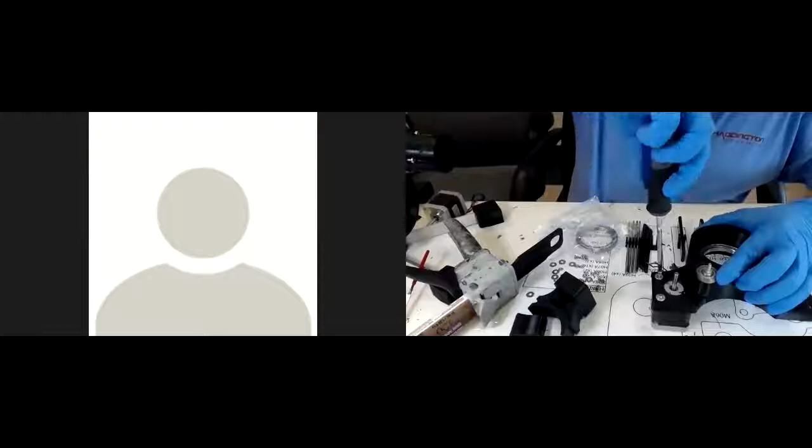Now, as you tighten these down, it'll pull that motor up into that slot. Now, in the manual, it talks about two different sizes of washers here, and we normally put a smaller M3 washer there, but it turns out that it's okay to go ahead and put the number 6 washer there. It looks better, more homogeneous.

Now this one is one that had the epoxy in there, and I can feel that hydraulic pressure pushing back on me. But there's not so much in there that I can't get the screw seated.

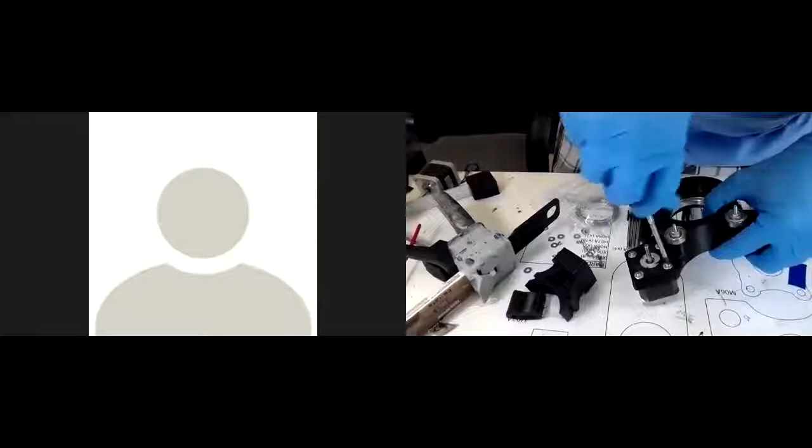And after they're all in, I like to differentially tighten them. Okay, and then clean up a little. Like to have pretty robots.

All right, the other side. Nice and thick. But I already noticed that I got some on that hole. Instead of cleaning it out now, I'm gonna take it off before I get that motor in there. Here we go.

And making sure that the wires go in. Laces in, laces in, yep.

That was a Jim Carrey movie. There's that, laces out. That was his, I think it was his first, Pet Detective, yeah, Ace Ventura.

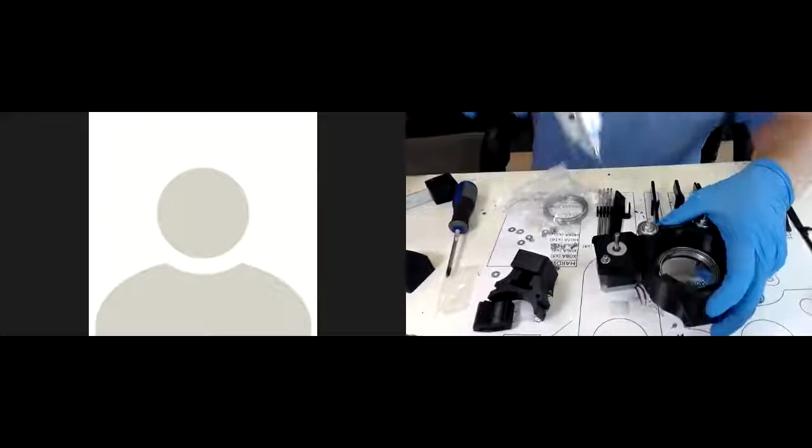Matt's joined us. Cornelius, hey Matt. Hey Matt.

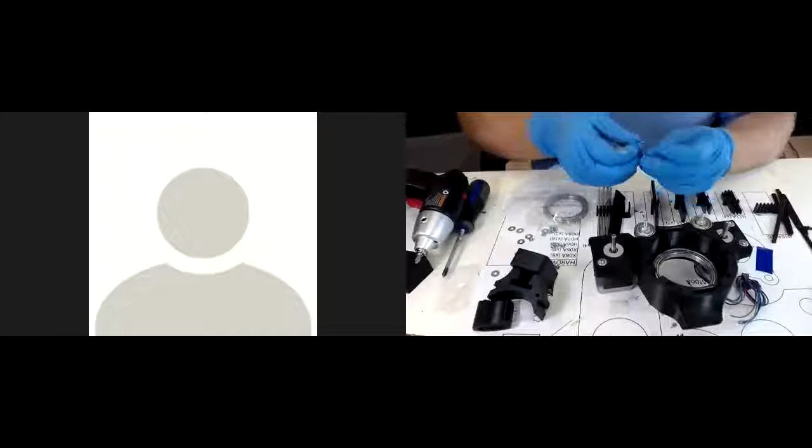It's a wrist break. Well, I turn it because I'm trying to control the torque. I don't want to over torque that until I get all the nuts in, all the bolts in.

Actually, let's do this in parallel.

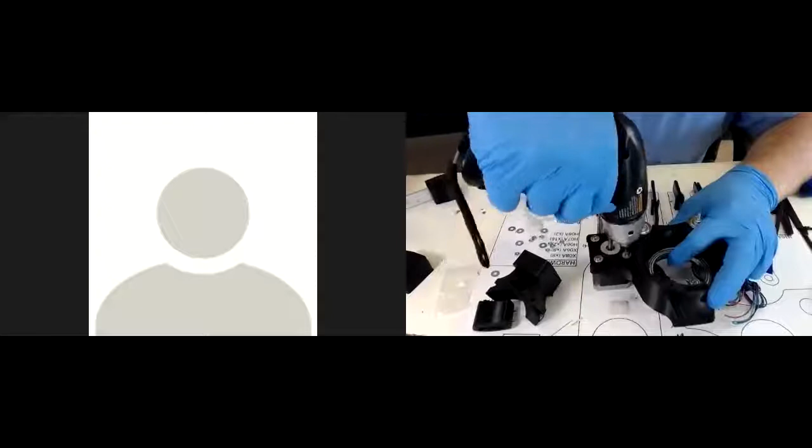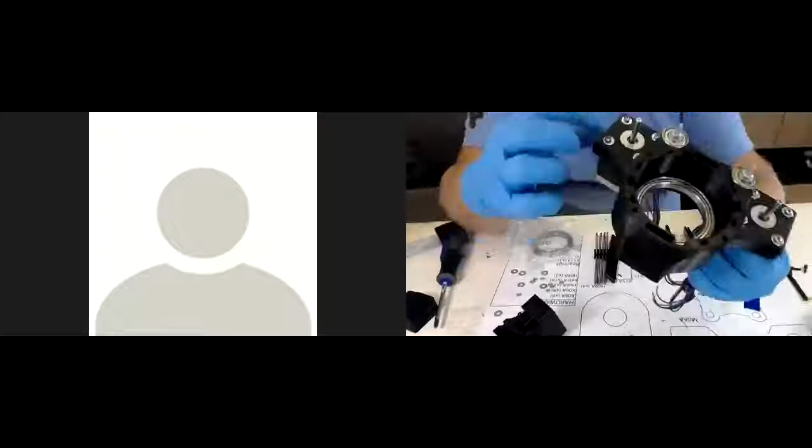Yeah, just enough to see it cinch up. You can see that glue start to squeeze out of there. And the important thing is really just making sure these are straight up and down, perpendicular to this. So if they're cockeyed this way, then when we put the belts on, they'll tend to roll off, and that's no good. All right, let's clean this up.

All right, now we're ready to put it on here and do the rest of the glue up. But before I do that, I'm going to check something. Because we have all thread, we actually dress the ends here after we cut them. But sometimes we don't get it really good, and I want it.

And you need to be able to rely on being able to actually put those bolts on, or the nuts on, while you're - here's the perfect example. I'll put another one when we go to glue. So that doesn't really go on very well, and if it doesn't, then there's some effort that you need to put into it.

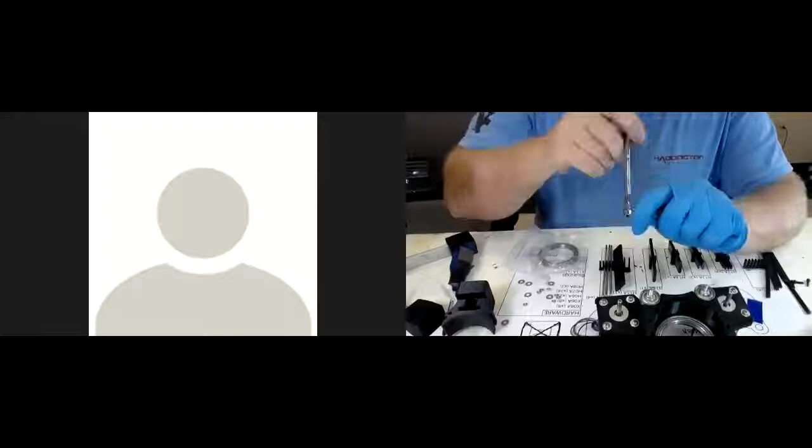There we go. Hopefully one of the sides goes on. And if you can't get the other side on, then this is a technique I use to make sure you get bolts on both sides. And I can do some of these fire. Yeah, yep, go ahead, do that. I'll take it and I'll just put it on the side that I can get it, and then slide it to the other end.

This one is good on both sides. Both sides? Okay, yeah. And if you need to, you can actually then just - man, that's not coming off. That's not going anywhere. Anyway, that's good. We'll use that for the other side. Make sure this one works on both sides. That's good.

And that's a little hard, but it goes on. Good. How's that one? You good? Both sides? Yeah, I checked one, let me check the other. Yep, no, I got lucky. Okay, cool. All right, back to glue.

Put some gloves on. Now this epoxy, actually, you're going to want to put gloves on and protect yourself, and goggles, because if you get it on your skin, it causes your skin to itch, which tells me that something funky is going on there that your body doesn't like. So you need to protect yourself from this. So we selected the epoxy not based on its toxicity, but based upon its strength. It doesn't expand.

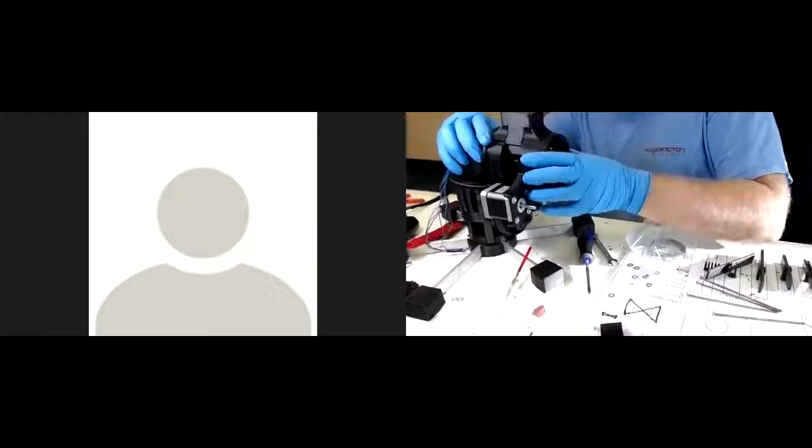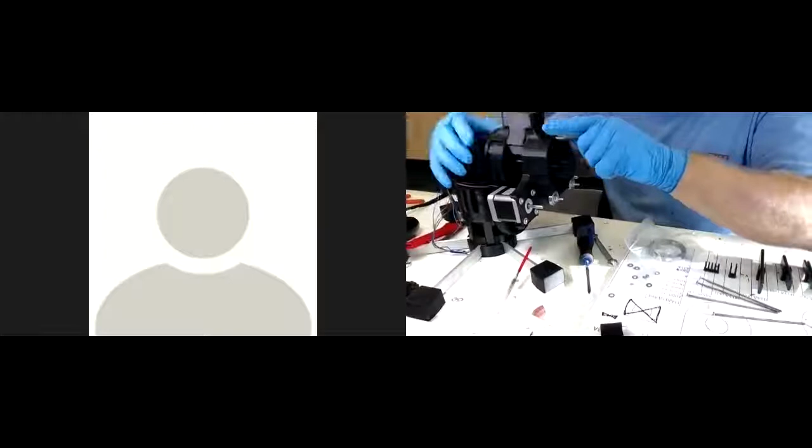Okay. Now I'm going to take the long one. It's actually pretty similar in length. Yeah, they're only 2 mil difference, but that 2 mil at the back is important.

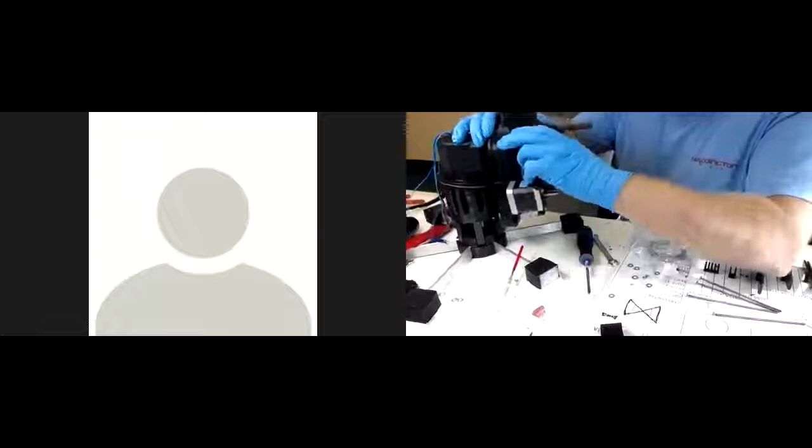Then you actually lube up the well, inside. We're just gonna, I'm gonna put one of these bolts through first. These are non-precision, but they'll hold things together while we.

Get one on the other side. There we go. That'll help. Yep, slide it, the whole project over. There we go. All right.

Now I'm going to goop up the edges of this. And I'm also going to force some down here. And also right through here, because this actually is where it connects in. And a little in here.

And here's another important thing I just noticed. It's good to have this code disk away from all this goo. You don't want to get that messed up.

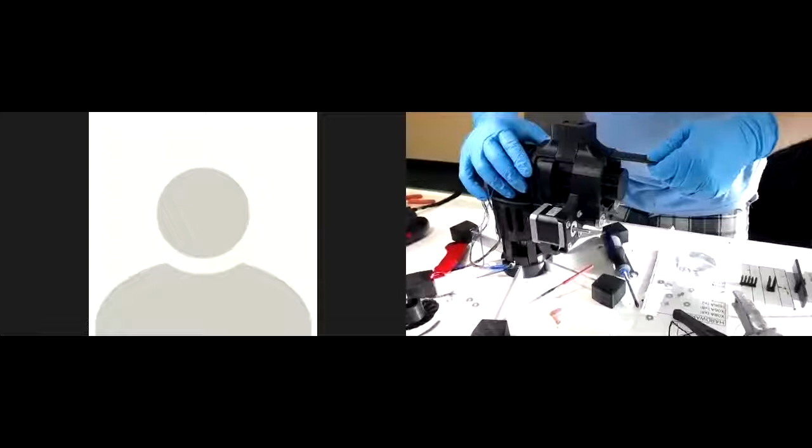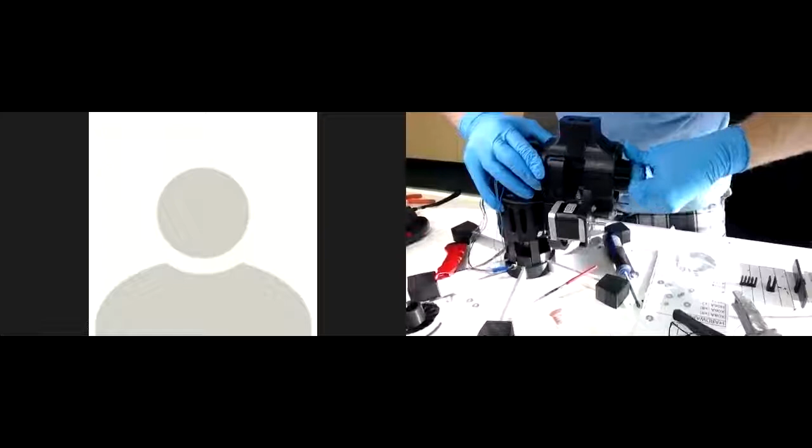Now, this is critical to get the positioning of this front strake correct. Okay, and what we actually want it. Clean this out.

Now again, the reason we're building this up on top here like this is we want the center of those two bearings to be right on the center of the transmission and right in the center of that motor.

Now, once I have this first piece in here, I'm going to put the strakes that hold this in, because this actually gives us a directional alignment of this. So, put some goo in here. And that's where these strakes come into play.

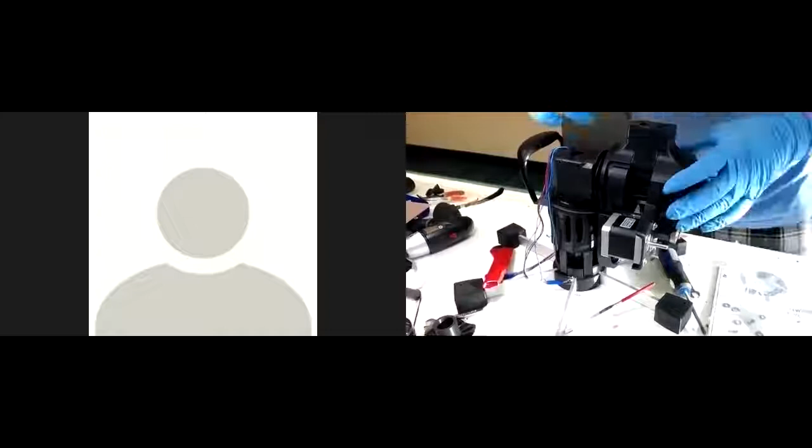And these are the H111A. Yep.

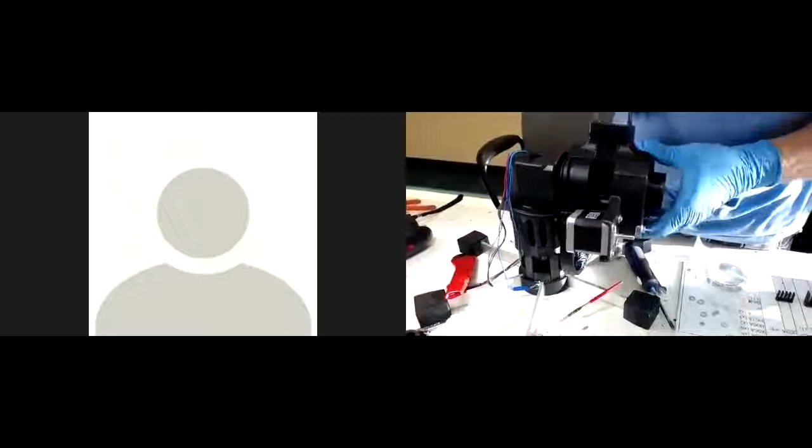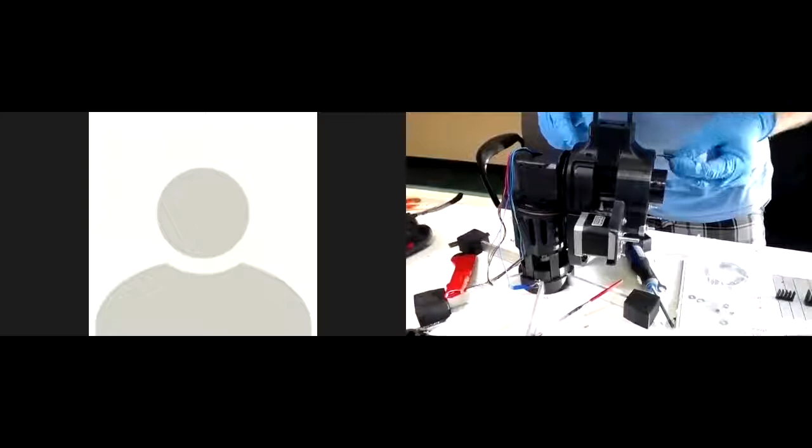And we're going to have to compress this down. Mm-hmm. And this is the reason for this, is that the reason we put these strakes in here, it gives us the, make sure we have it aligned in 2 axes.

The reason for the length of those bolts is we can use them as hard points to mount other stuff on that you may want mounted on the robot, right? Yep. And this is a temporary thing. We're using this all thread to make sure that these are compressed together.

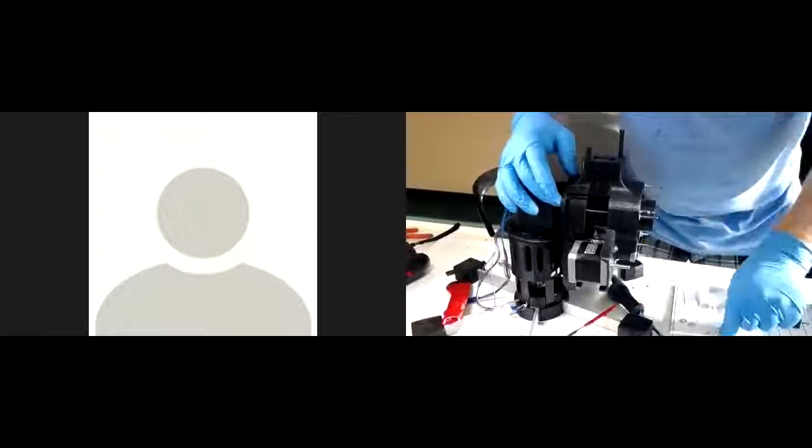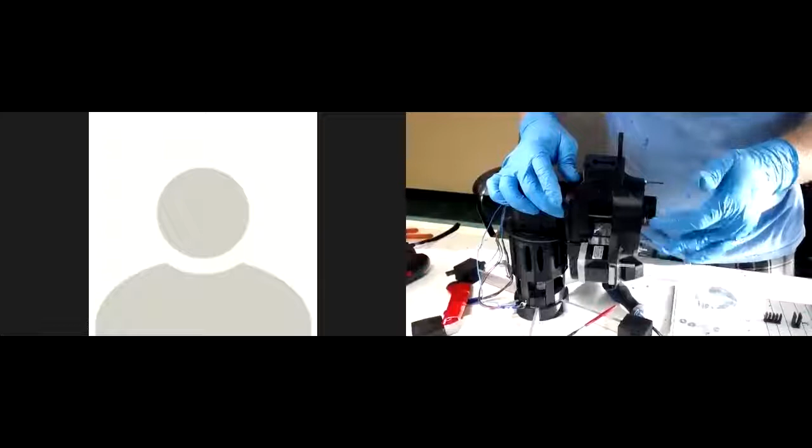And your pot life on the epoxy again is easily 20 minutes. Yeah, so you don't have to hurry through this. And with that mixing tip, it's 20 minutes every time you press the trigger. Yeah. So that's a good trick.

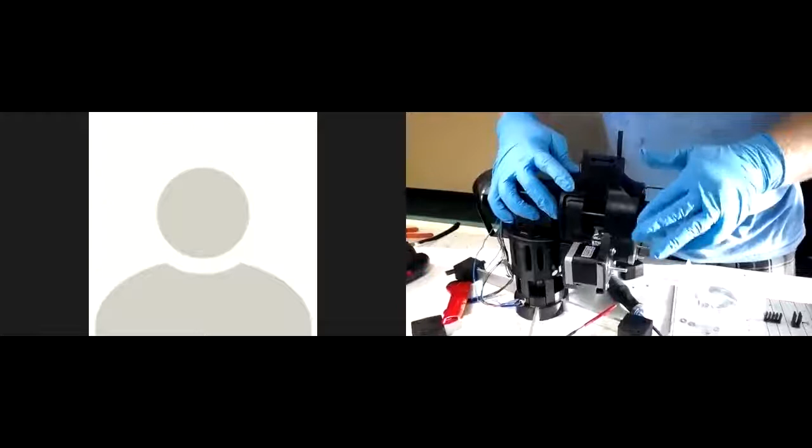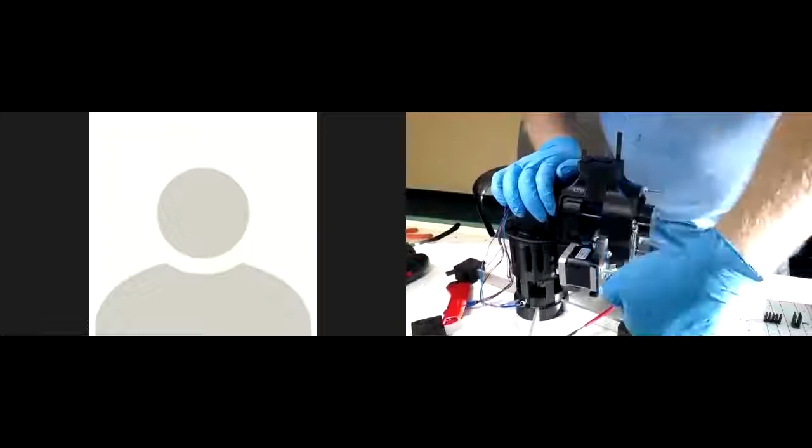I'm just gonna barely tighten these down because I still got the back to put on. Okay, in fact, I'm gonna put that on now so that we have it in there. Yeah, I made that mistake once.

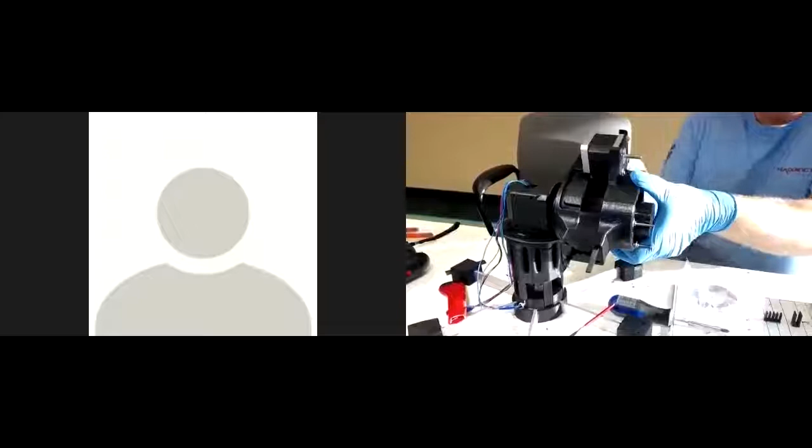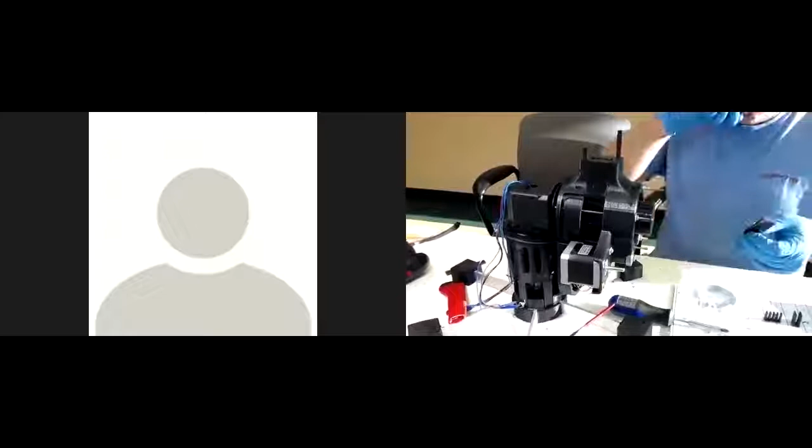Go. All right, I'm going to put the other one in. And you need to comment the importance of the top being sticking out the back. Oh yeah, Todd was just reminding me that you don't want these, oh, the top. Yep, that worked. Yeah, I started that, didn't finish it. Highlight that again. Yeah.

All right, now that I got these two main strakes in there, and I can push down on this. I'll bet you it goes in. There we go.

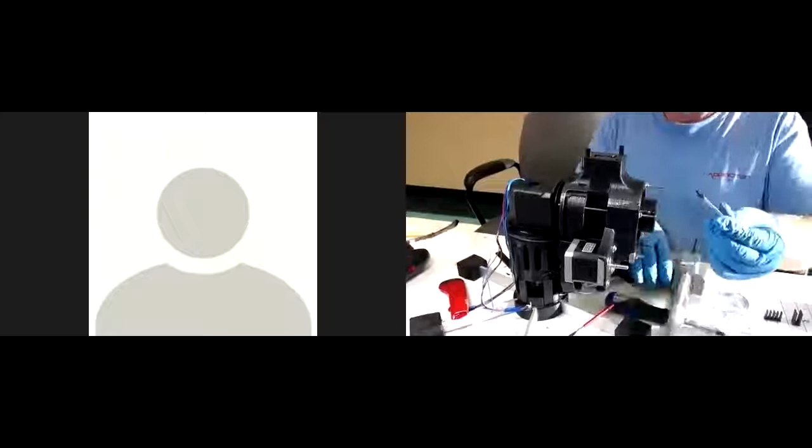Let's get these in. And I like to do these by just putting the epoxy on the edges of it, and as you push them down, they draw the epoxy in.

Whoops, that went too far. It's actually touching the motor, so pull that out. There we go. Yeah. Yep. Good save.

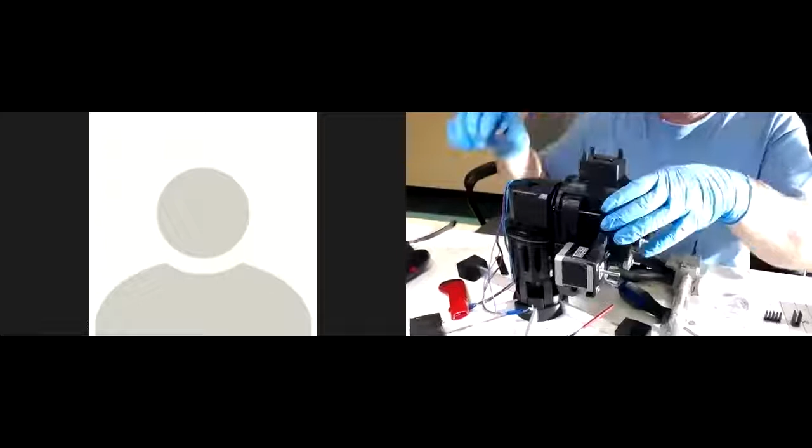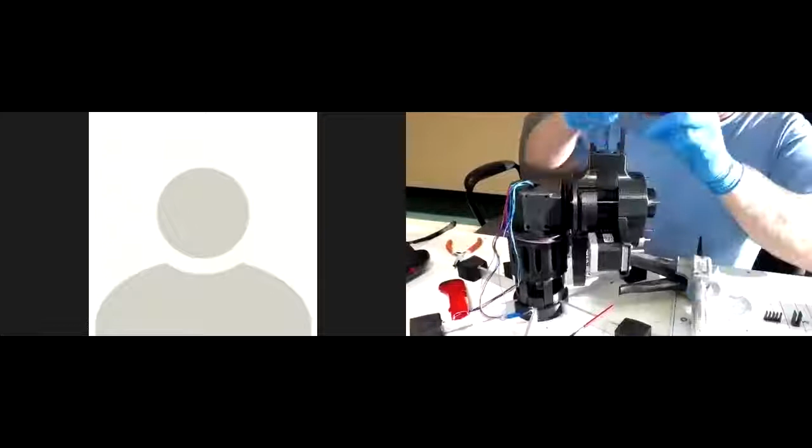Just a little tap. There. All right. There's that.

I'm going to take a tap on it just a little bit. Actually, that's not a good idea. I can feel it pushing it away from the, yeah. So, I want to leverage that. I'm going to hold it while I hit it. Nope, I'm not going to do that. It's out too far? It is out too far.

What you really want is just about 2. There we go, there we go. That's perfect. That's about 3 millimeters, right? Yeah, well let's measure it. You got a caliper? Yeah, the real. Well, and these need to be clean too. I want this clean.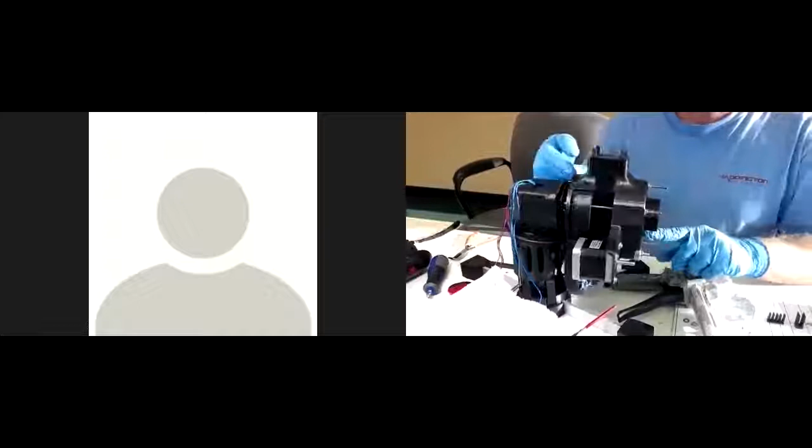on this side we want to be flush with this. Otherwise, we have to grind them down also, and the pivot stator holder comes over the top of this.

So now that we've got the two main orienting carbon and strengthening carbon fiber strakes in there, I'm going to put the other pieces of all-thread in there and tighten down on this, and make sure we clean the top strakes as well. We've still got to put the I-beam in there.

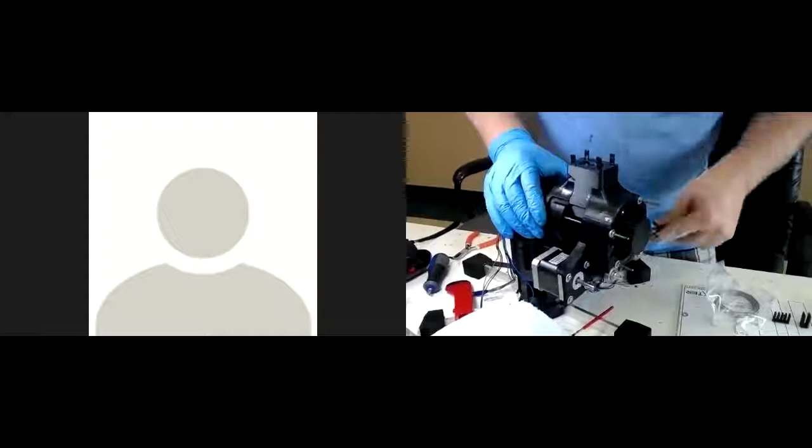Matt says we should have Haddington branded science aprons. I like it, that's a great idea. Well, we do, we even got the shirt with -- we should send a T-shirt with every kit. Plastic ones. Oh, plastic apron, that's a good idea. Okay, that's good, all right.

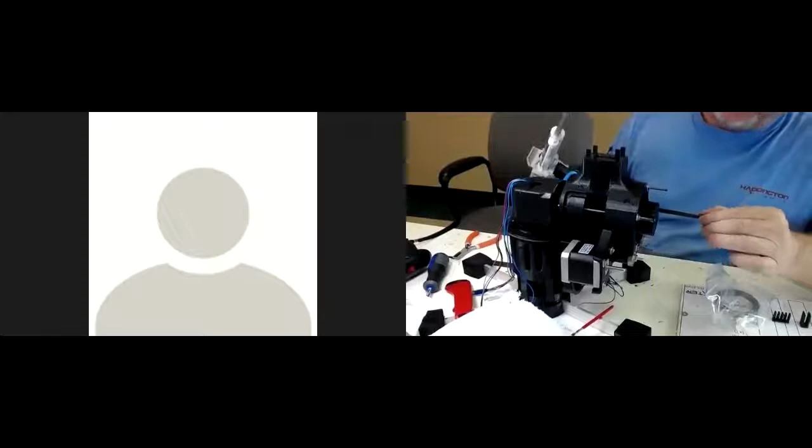Now we're going to put in the other strakes, get those glued up, and this is a kind of a trick. We don't really want to put glue on all at the same time. I actually don't put any glue at first, I insert the top in, and then while it's down here -- can you see that, Todd? -- right in here, before I insert it into this bottom hole, then I put the glue on the edges there so that goes into it. Then the same thing on the top here. I put it right next to the hole so that it can wick in as I push it in, and I'll actually move it back and forth in there to fill that.

And I want these to be past flush on the top side here.

Now that I got the bolts done, I'm going to put these gloves back on. It really makes your fingers itch if you get this epoxy on your fingers, and it's probably, I don't know, probably dangerous.

Well, the material safety data sheet says, yeah, don't get it on your skin, fingers, ventilated. Yep, don't drink and glue. Don't drink and glue.

Good, I like it. All right, same drill for the other ones.

Oh he said, yeah Matt, I just see that -- just thought someone holding a flashlight shining the holes, or the holes are part of it, would be good. We could see if that works. Next time I'll turn on the flashlight. Okay. Oh yeah, flashlight from the phone, good idea.

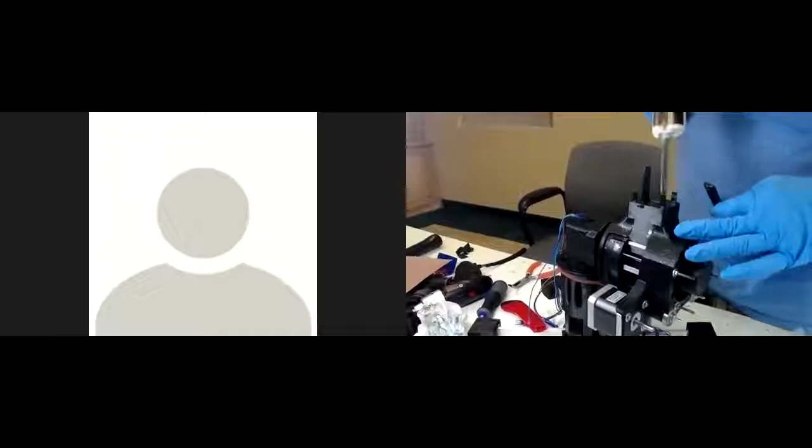And this is butting up against that strake that's going through there. A little bit more glue in there. There we go.

And then I'll actually put a bead on each side of this, because when I slide in the large one, and now there we go. You know you've got the right amount in there when it starts to push out the glue. You want to get this so that it actually touches the carbon fiber strake that's going down the other side. This is your main support system for the arm.

Cool, and because this came out of the edges here, we know that we've got that chamber completely full of epoxy. And then you're going to want to clean out the rest of it. I actually will clean it up along the edges to get the I-beam completely covered, those intersections.

You don't want it too much because you still have this intersection coming down. So you want the center of it cleaned, but the edges, the corners where the I-beam is, you could go ahead and fill those up because that has the same profile. Yeah, the profile here, can you see that?

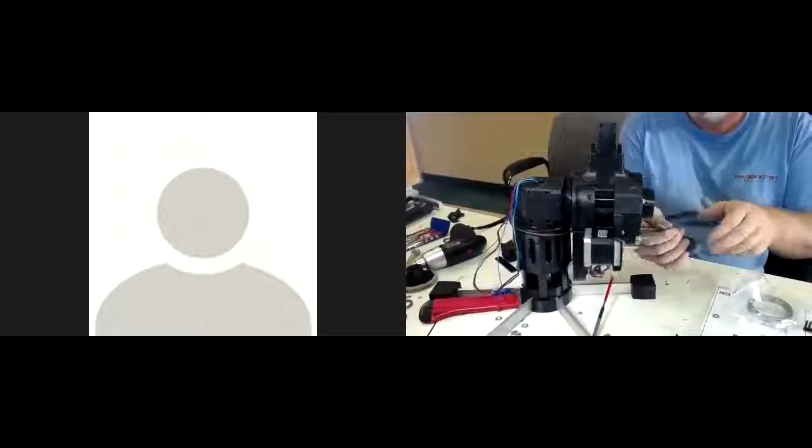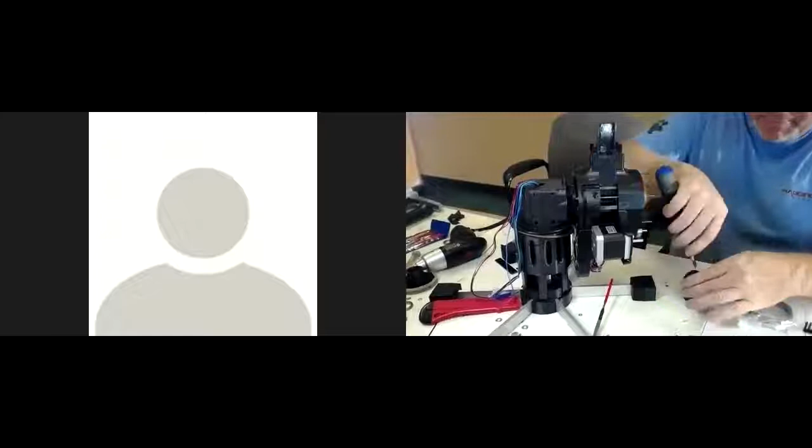I'll let you pull those out while I'm doing this next step. Okay, so now we're going to take 6 of these number 12s of the hex heads and these washers, and we're going to insert them.

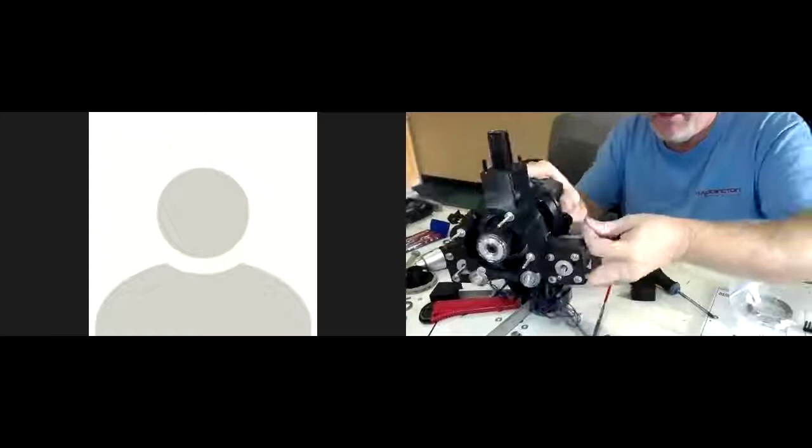Let's see, sorry, it's shiny. Yeah. Into the holes here. Let's see if we can't get some light on that. Oh yeah, that's actually showed up really well. Okay, that's good. I'm going to grab a transmission and just...

Right in your face, but that's all right. Can you see well? Can you see it good? I can. Okay, so I'm going to put the washer on the screw. Hold it in front of the light.

And then now these are just the right size. There's a little carve out in that flex spline holder that holds that washer, and it's just the right size to position that washer correctly.

So sometimes you need to make sure that it's actually seated in that part, or else it won't actually touch. See, that's incorrect right there, because it's not actually pushed down into the plastic. So I'm going to use a screwdriver and push it down. There we go.

Now it's seated correctly, can you see that? Yeah, can you see the difference? That it's inside the lip. Yeah, it's under the lip there. Yep.

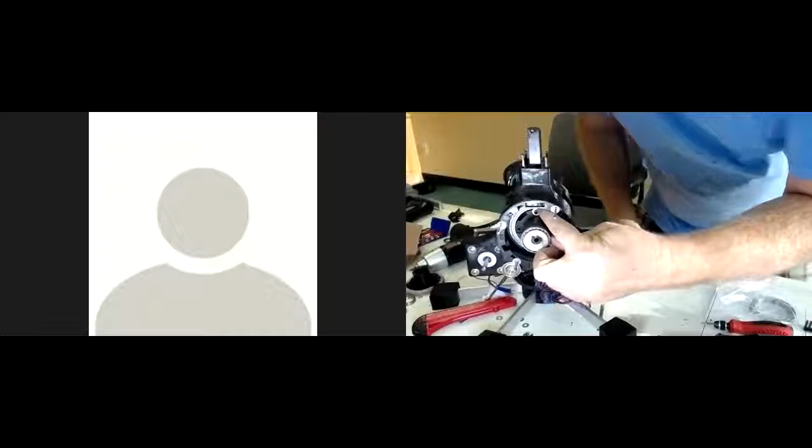All right, now as you can see, the washer actually touches the inside race of that bearing, and when we tighten down on it, we'll actually deform that washer just a little bit, and we know we'll have the right pressure and pre-stress on that bearing.

Let's get all 4 of them in. And the last one.

I'm going to leverage gravity here. You've seen the other ones. There we go. You guys don't have to assemble it this way for the camera, but you can turn it up and use gravity to help you orient those washers.

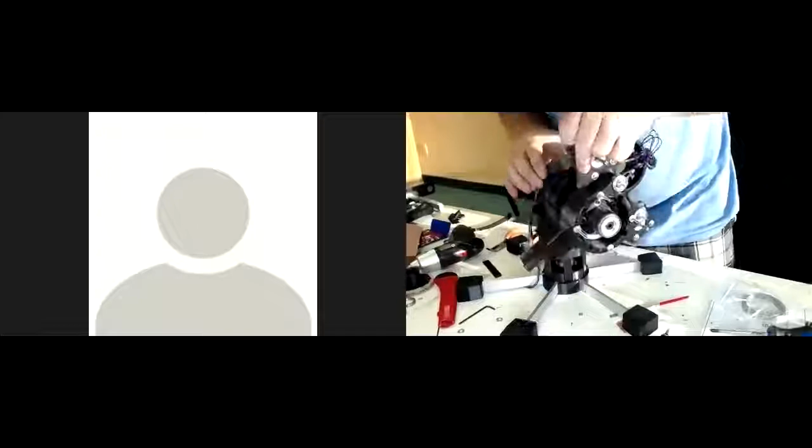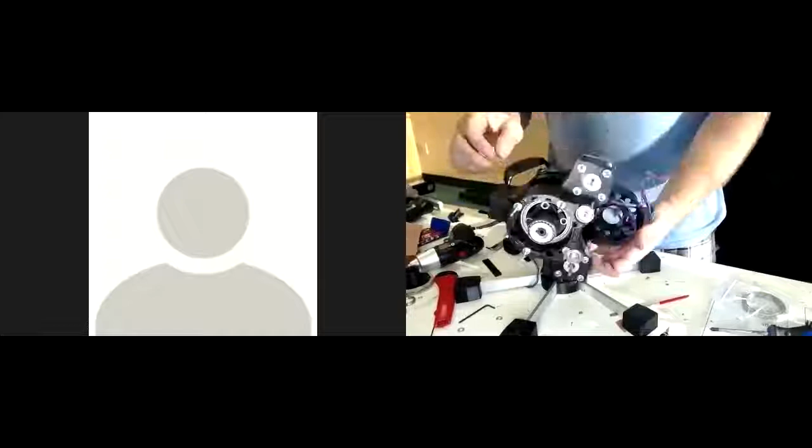And while this is drying up, we kind of move this around so that we can make sure that there's no binding anywhere in there, and that it moves freely. With that bearing pre-stressed like that, it'll actually amplify any issue if this is off center, if the bearings are not centered with the motor, it'll amplify that feeling. But this is really smooth.

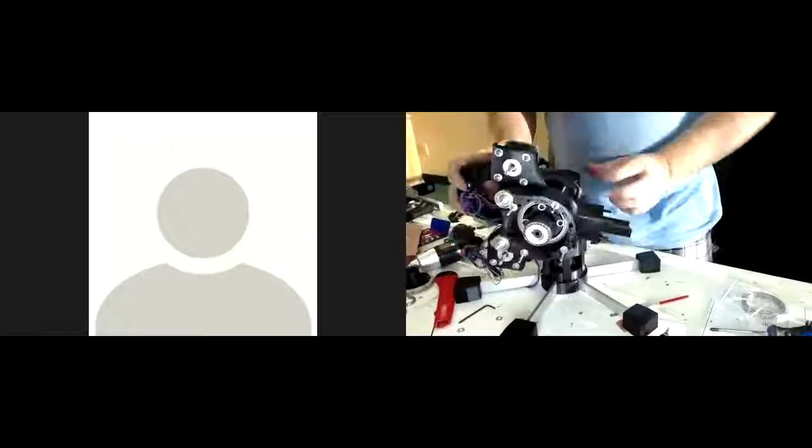You'll feel it bind just a little bit if it's off center, and if you do find a bind, you want to move it back and forth through that bind and loosen it up. What that's doing is causing all these glue joints to seat in there and be perfectly centered and aligned. But looks like we got a pretty good alignment. I can't feel any differences, and there's absolutely no movement.

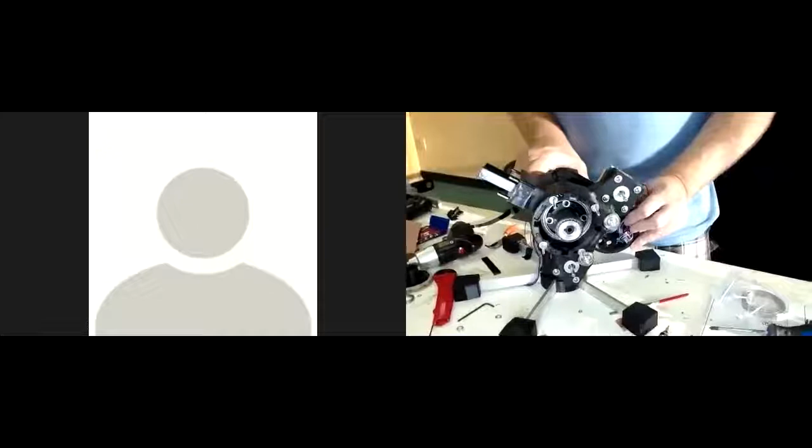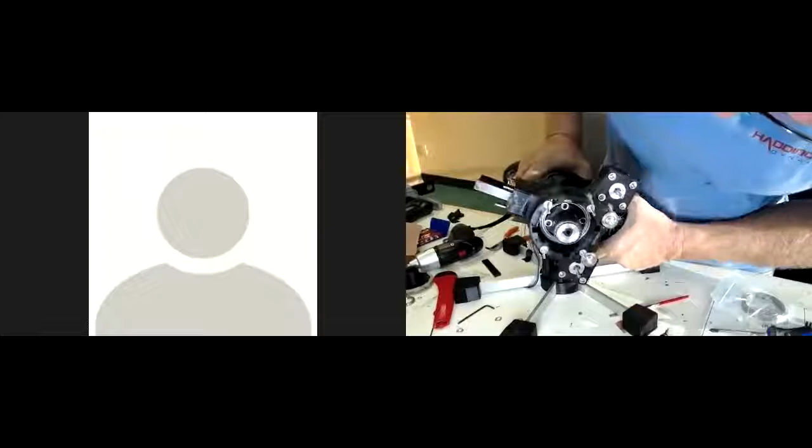See, there is movement. Oh, but that's because that's right, that's why we put glue on that bearing, because I do feel that movement in there. So what we'll do is, as this dries, every 10 or 15 minutes, we'll come and drive it around in a circle and make sure that gets lined up right.

Anyway, that's what we'll do for now. We want to actually, well, let's prep the stator now. I've already got, Todd's already got three of the bolts in there. But we'll just talk about what we're going to do. Problem is, I don't want to take these screws off, because that's what's holding this assembly together. But we'll talk about what we're going to be doing when that dries.

So to put the stator on, you get a nut in that one? Yeah, there's a nut in there. We want to get the nuts in there so they don't fall off when we put it on, but we don't want to tighten it down. We want the stator to actually slide around a little bit inside of here. It's a little bit oversized, just a tiny bit oversized, so that when we put this on, we can align this stator to the flex spline also.

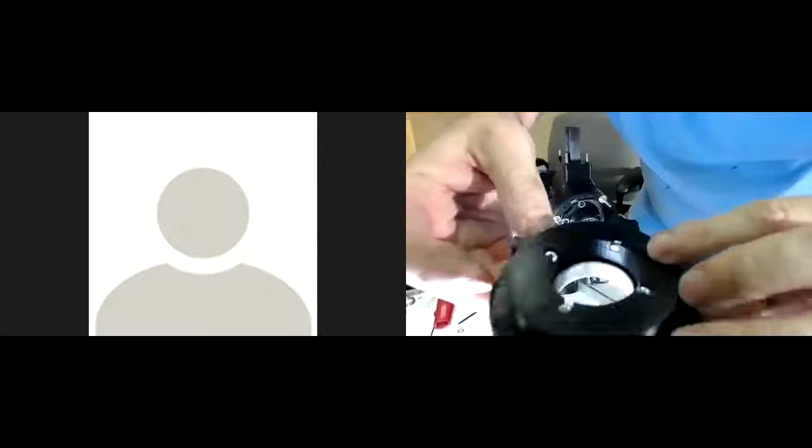So yeah, those are, so you can see that, let's see, they're not actually all the way down, but they're far enough to be started in the thread holes. Actually, that one is.

There we go. And one of the ways I do that is I tighten it down all the way, just to make sure that everything's flush and that support material is cleaned out, and that the screws are actually all started. Like this one wasn't, put your finger on it. Yeah, now that it is. And then what I do is back off by a couple of turns, tighten it down and then back it off.

And what will happen is this stator will just slide a little bit back and forth once we put it on. We'll start to put it on, but we won't put it all the way on. This is one of the reasons why we need all these things flush, because the stator mounts flush here.

So after this dries, I'm going to redo this procedure, but I'll tell you about it right now and we'll simulate it. We're going to want to take these nuts off and these washers off after this dries in order to put this on. But we're going to put it on anyway, just to show you what you do after the rig is dry.

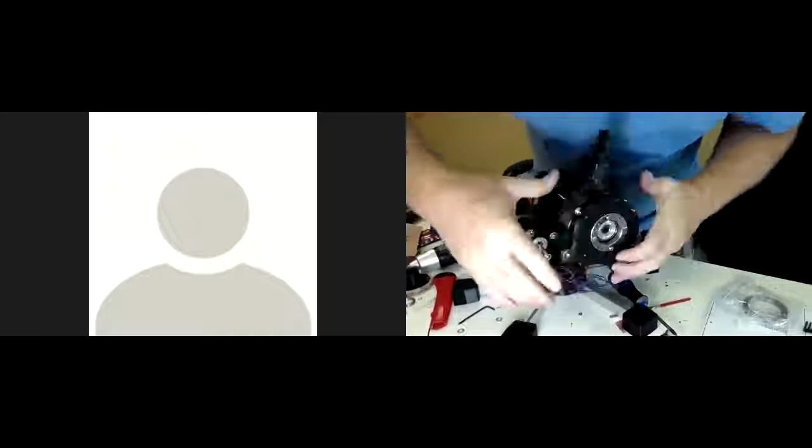Remember, these bolts and these washers are off in the real drill. Now we just slide it down until we get to the very top layer. Okay, so that's the stator, it's just now barely touching the flex spline, but it's not actually engaged.

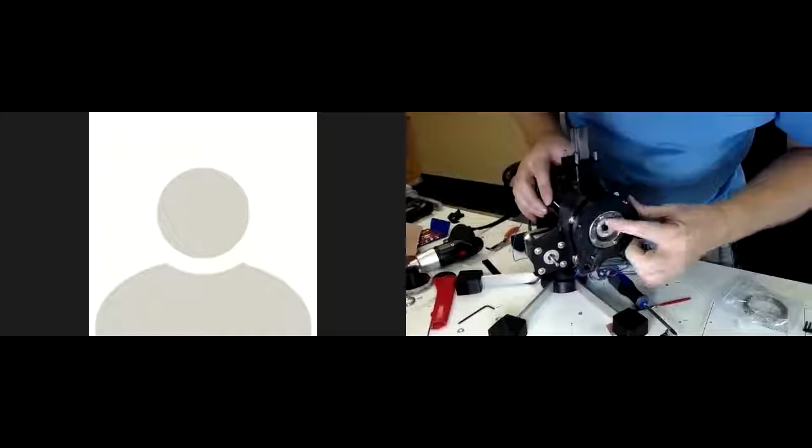Right? So what we want to do is very lightly press this in until it engages. We don't want to use any kind of force on this. There, I can feel it just engaging.

Now, what I want to do is, I don't want to damage the flex spline, so I want to push this on parallel to those, so these gear teeth are in the same plane, same orientation as I push this down.

The way I do that, once I get it just touching, I'm going to rotate this a couple of times forwards and backwards and make sure it moves very, very smoothly without any binding. If it's offset, you'll feel binding in there, and as you push it around that area, it will straighten it back up.

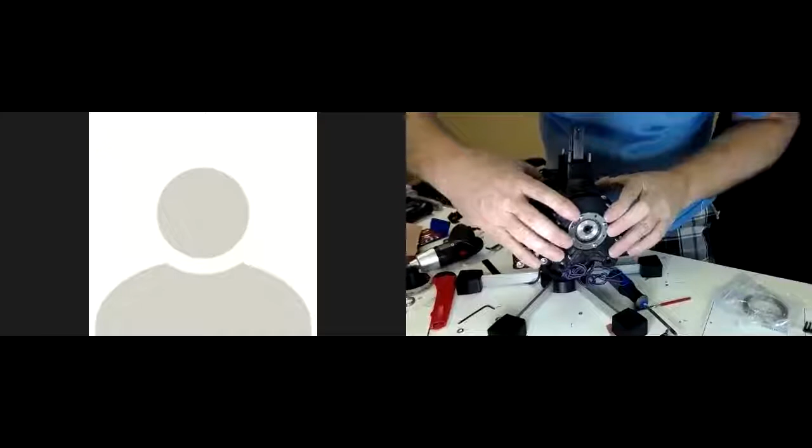So it actually is pretty smooth right now. So then I'm going to put equal pressure. Oops, this side moved and this one didn't. So as I move that, I can feel the bind right over here.

Anyway, once you get it about halfway on, you can slide it the rest of the way, and it's fairly easy. But it's actually hitting it against the nuts now. So

That's the technique to actually get this in. And once it's flush against the back here, we're going to put the washers and the nuts back on and tighten that down. Once it's tightened down, we're going to continue moving this back and forth, and we can put a little bit of pressure on this, and you can

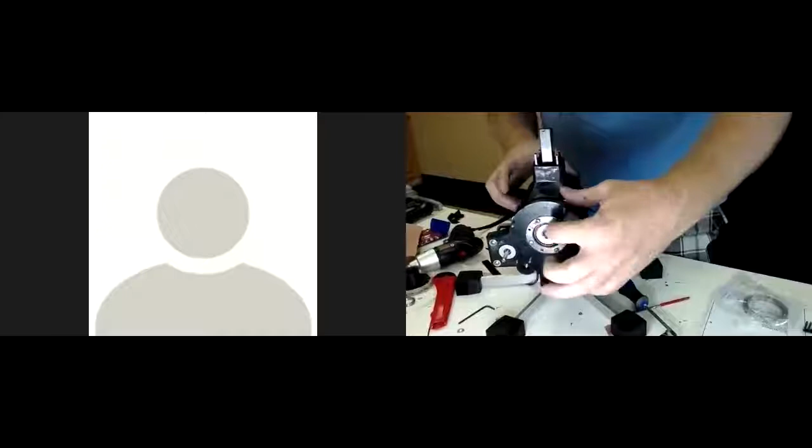Then you can back drive it a little bit like this. It's really smooth right now. Then you get it to a point. Oh, there it is, moving around. It's centered, and then you can tighten up these bolts.

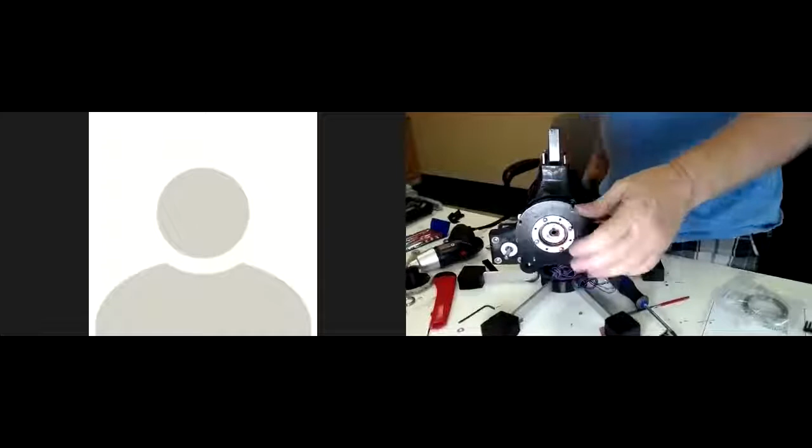And so we're not putting the 1 inch. Oh yeah, and we're not putting that on there. Yeah, right, that's already attached. That's right, that's here, already attached. That's how it comes. So, all right, William.